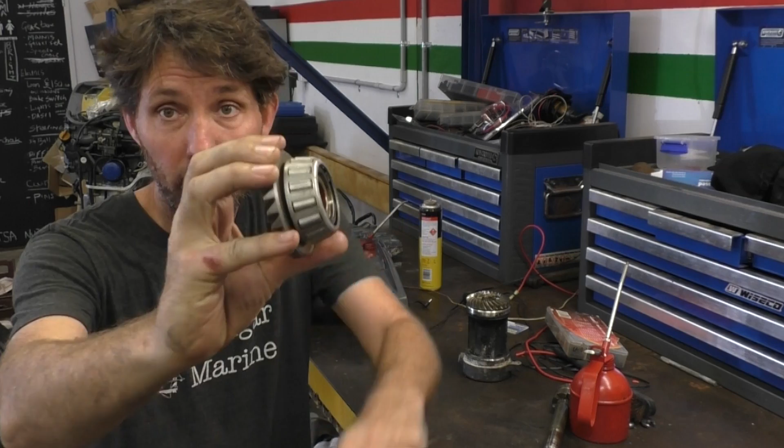Week after next. Then I thought, I know, we can go through replacing the bearings on these forward and reverse gears from when I changed the dog clutch, or some old video, I can't remember. But then I realised the spigot bearing puller I have doesn't open far enough to get the bearing race for the forward gear out, so that would have been a bit of a lame half video too.

Then I thought, I've got a kit for a sender and a fuel gauge, so I could put a fuel gauge on the green machine, but the sender unit's actually taller than my fuel tank is deep, so I can't do that either. But I will - I'll make a fuel tank, put the fuel gauge in it, but not today.

Another photo I posted on Instagram was of this water pump impeller. As you can see, it's very chewed and wasn't pumping any water at all. This outboard came in essentially just for a service to be swapped from one hull to another, so I don't really know the history of it, but when it started up it was running quite badly. I cleaned the carburetor and put some new plugs in, but it still runs poorly and backfires a bit. I'm starting to wonder whether maybe it's overheated badly at some stage and there's some damage, maybe a head gasket problem.

So I thought we could just do a bit of diagnosis on that one in lieu of every other idea not panning out today. What I'll do is start by putting the new impeller kit into this. It's not a video about doing a water pump, but I'll go through it quickly, noting some points about it being quite damaged. We'll see what came in this kit too, because obviously there's a lot of molten rubber inside the cup and inside the housing. So we'll fix that up, and then I'll fire this up and show you what it's running like.

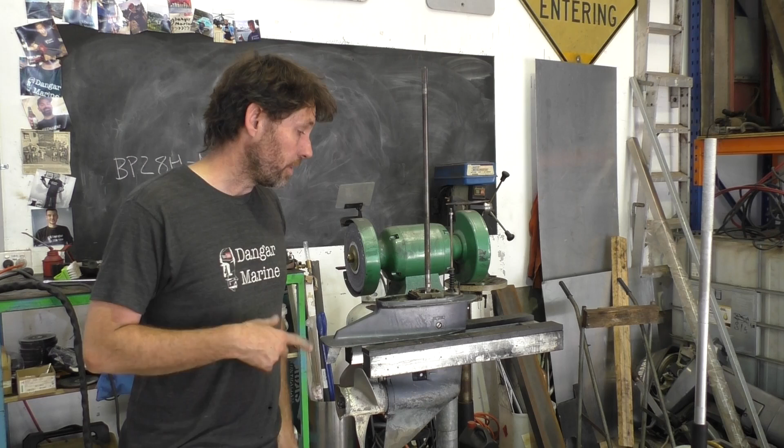Before I do this water pump kit, I'm just going to drain the oil in this, because now I'm down to having the pump plate off. I can maybe see if I need to do the drive shaft seal before putting the pump in. So we'll just see what condition that oil's in. This oil doesn't look too bad - this is the oil from this Yamaha. The yellow oil is the emulsified oil from the Evinrude 150 that I drained just before.

So we'll push on with this pump. Under here is just little fragments of rubber from the impeller. I'll clean all this out and then we'll start putting the new pump back together.

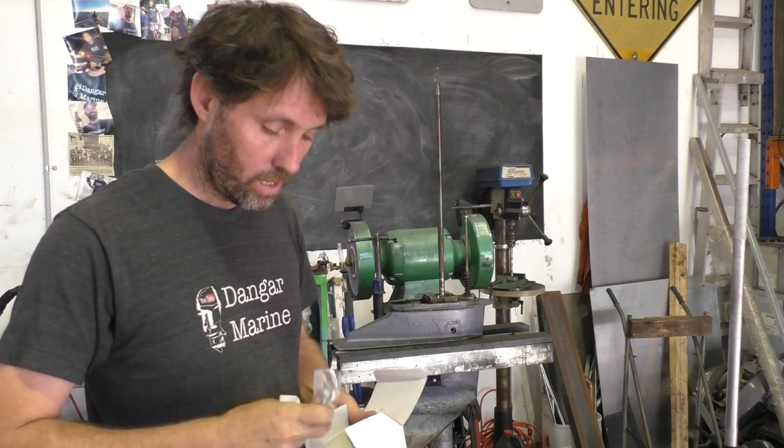So this is the kit I'm going to be using, and this is the part number for it. It's got a new pump housing, which is good - saves me cleaning up the old one. The impeller, of course, some new bolts for the housing, a new woodruff key, a new O-ring, and a new base plate.

The base plate has got a lot of rubber melted to it, and the internals of the pump housing has a lot of rubber too, so I'm glad we're just going to be replacing both of those.

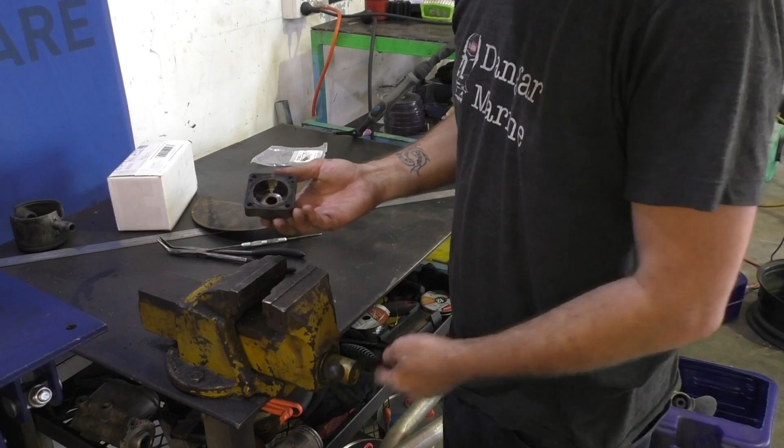To get this housing out, I'm just going to rest the edges here on a vise, and then tap it from the top to punch it out. With this vise, I'm just going to open it far enough that the pump casing rests on the edge, but the internal pump housing can drop down. Then I'll just get a little punch and a hammer.

Before I start, I'll just use this pick to pull the old O-ring out. So we'll get rid of that. I'm going to use my hand to try and hold this to stop it bouncing while I tap it.

Starting to come out easily enough. All right, so old housing out, old O-ring out. So down in here, what I thought was a bit of impeller blade I could pull out is actually this pump housing having melted.

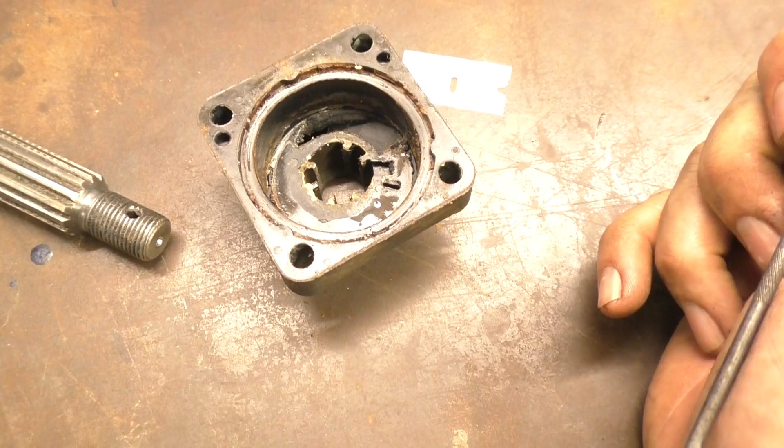So it looks like the curse is continuing. I've just figured out why everything's going wrong today - it's because I don't have any beer left. I've always said it, don't try and fix an outboard without a beer.

This is what happens. Given everything else has gone a bit pear-shaped, one thing I did want to talk about was making a little remote engine starter. They're great for checking things like spark, where you need to be at the back of the boat. We touched on that in the 'what to do when your boat breaks down on the water' video a couple of weeks ago, but I don't think I explained it very well. So what I'll do is jump up to the chalkboard, draw the circuit for the starter solenoid, and talk a bit about this switch. It's pretty simple, but I probably should explain it properly.

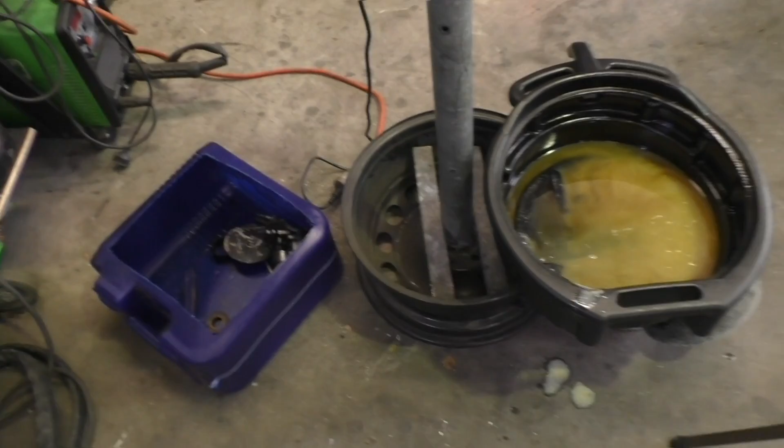Oh, you may have also noticed that I went and got a steel rim from a scrapyard. They also had these sash weights, just lead weights, at the scrapyard. A bit of gal pipe, so I just welded that in the bottom, and then a little bit of plate on top, so I can have my outboard leg holder here and a little platform for the grinder.

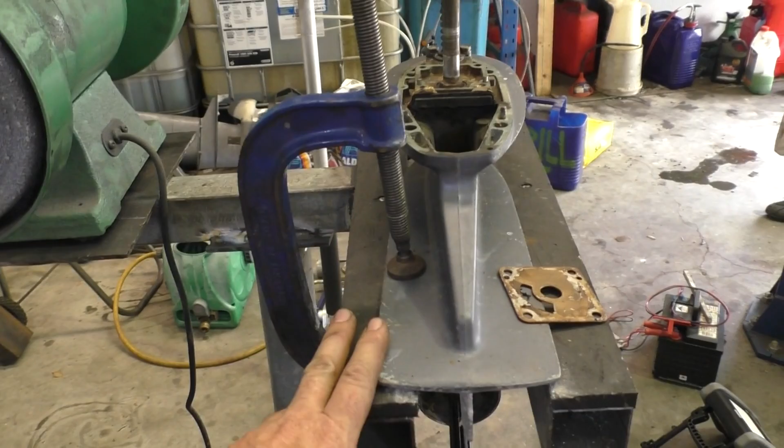It's not ideal in that you don't want to be grinding onto outboard legs, but quite often I'm doing either one or the other, and it means I can put this wherever I want, which is great. It's no longer in the vise because that was a bit of a hassle. The other good thing is if I'm doing a lot of grinding, I can move this pedestal near the door and let all the grinding dust end up there, where I can sweep it up more easily instead of it ending up all over the workbench.

So far I'm pretty happy, and surprisingly, even with that really heavy Evinrude gearbox in it, it's quite stable - more than I thought it was going to be. So that worked out all right.

All the starter solenoids have 4 connections on them. This is an aftermarket Sierra one - you'll see it replaces a Mercury and Yamaha unit. This is what they look like generally, very similar to this, where there's 2 large terminals and 2 smaller ones. So I'll draw that on the board and show what it does. If you imagine a unit here, it's got 2 small connectors and then we'll call it 2 large ones on this side.

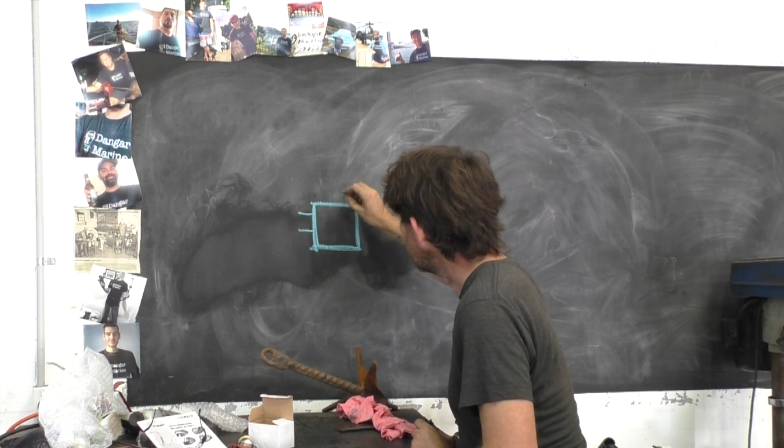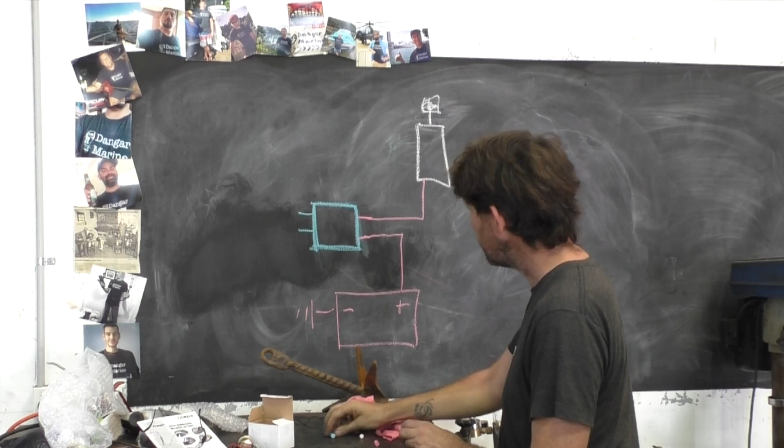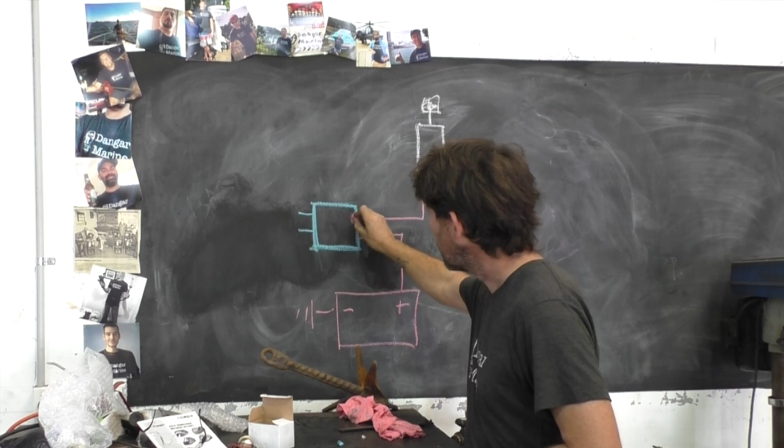The way it works is your battery has a positive and negative. Negative goes to some earth. Your positive comes up to one side of the solenoid. Up here you'll have your starter motor, and the positive comes up to one side of the starter motor, then the other side comes down and goes to ground. So these 2 connectors are the 2 large terminals that carry quite a high current.

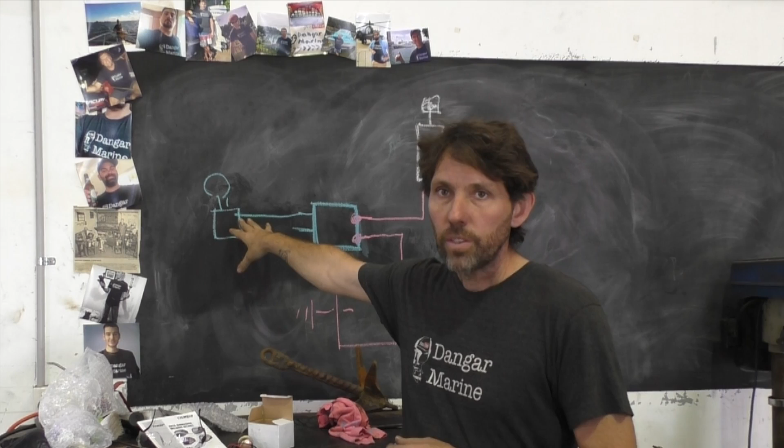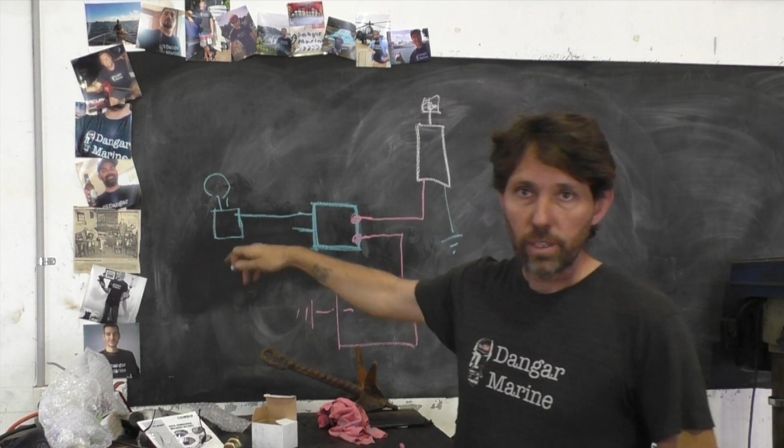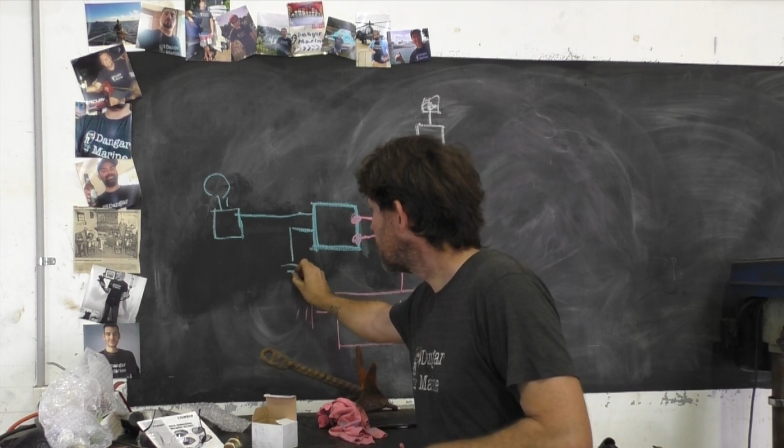So the current it needs to crank the motor over - hundreds of amps essentially. Up here you'll have your key switch, either your forward controls or it could just be a push button start. One of these wires, this red one in particular, has got just a loop for the black and a bullet connector for the red. Your red attaches to your loom if it's forward controls, or up to the starter push button on the cowling if it's a tiller steer. And then the other one here just comes to ground as well. So that's what the ring connector is.

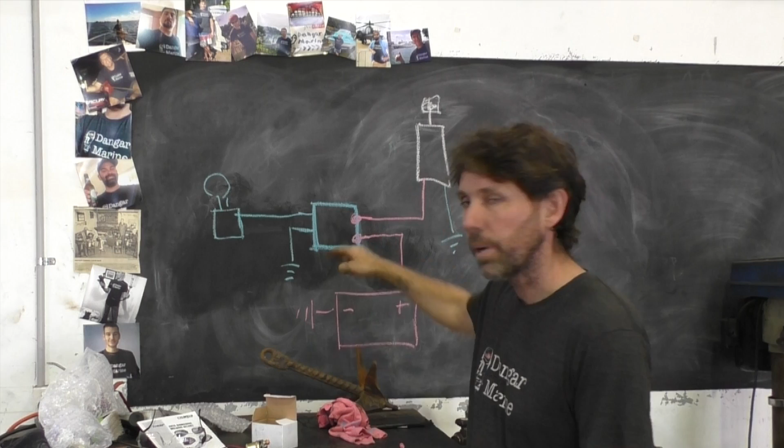Your forward controls also pick up a positive power. Often it does come from the positive terminal on the solenoid - that's a very common place for outboards to pick up power from, because it's basically a direct connection from the battery. So your forward control picks up power from there and sends it to here.

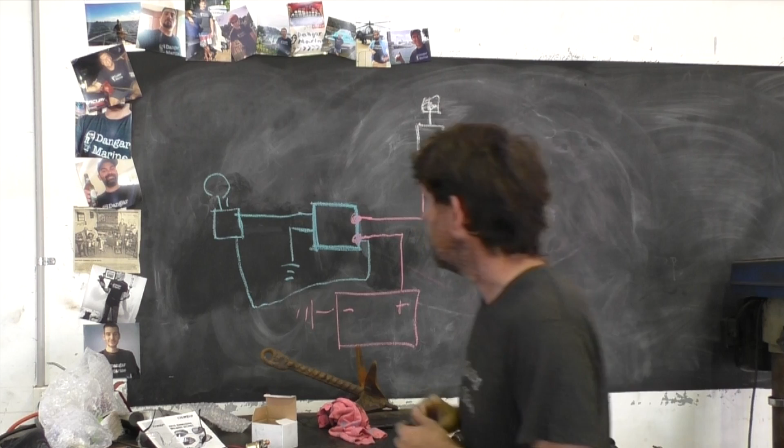Now, when you turn the key, all this is a switch. When that switch closes, positive power can run up to your switch, come to your solenoid. It then activates a coil, goes to ground. When it activates the coil, it closes this switch, and that allows power to run through your starter motor.

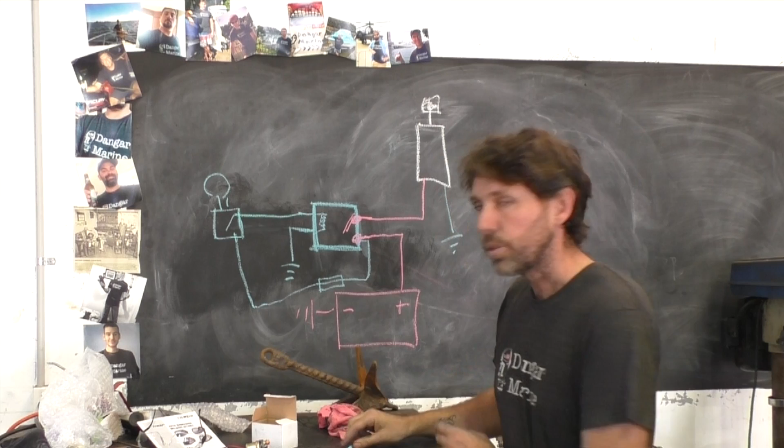Now this circuit here is often fused, so if this fuse blows, when you turn the key, no current flows through this coil, which means this solenoid won't click, you won't hear it activate, and no power is allowed to run to your starter motor.

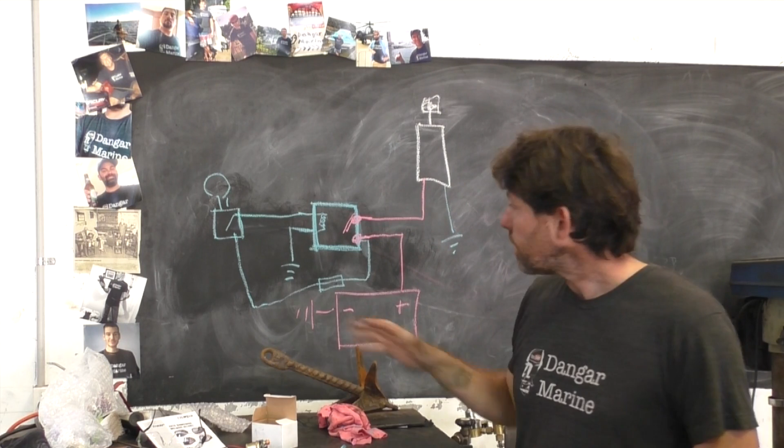So in that video, when I was bypassing this whole circuit, all I was doing was using that remote starter to take some power from here and apply it to here. Then a small amount of current flows through the wires of that starter switch to ground. It activates the circuit and then allows the high current to run to the starter motor.

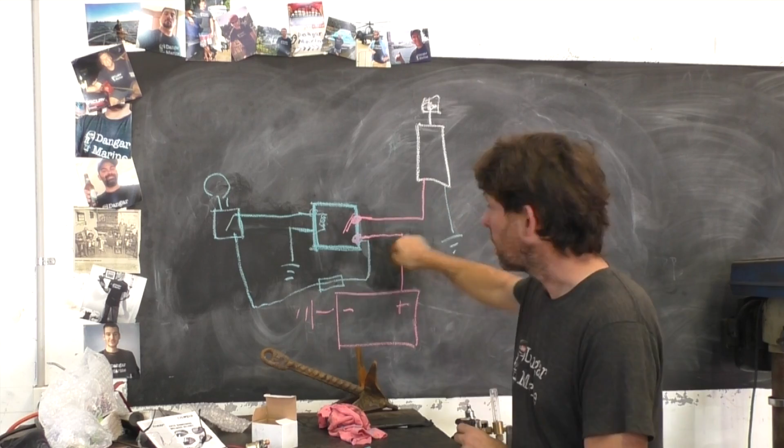So this switch is one I had lying around. It sort of suited me because it's actually got a bit of a handle to it, large enough. It was actually a limit switch for a cart. As the cart went by, there was a roller on the end here, and it would come over the roller and cut the power to an inclinator.

All I did then was go and get a little radio knob style thing from Jaycar, took the roller off, put that on the shaft, then had 2 wires that don't have to carry a lot of current, so they don't have to be huge, and put on a couple of alligator clips. And that's really all it is - 2 alligator clips and a momentary switch.

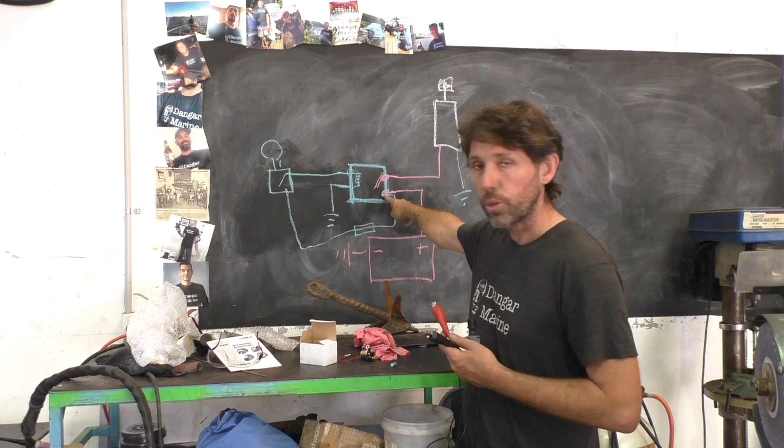So really straightforward. Then what I do is I hook the red side to a source of power. That could be straight to the battery positive, could be the terminal on the solenoid where the battery positive comes to. I just need 12 volts.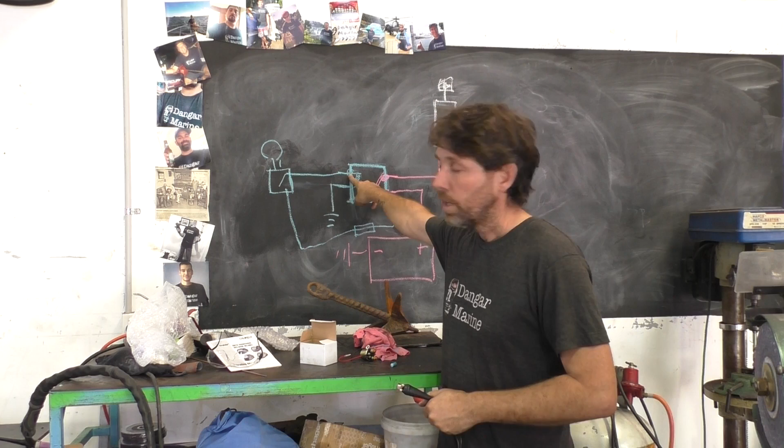Then all I need to do is connect the other side, the black side, to the positive on this solenoid. So there's 2 small wires. One has to go to a ground, then the other is where I hook the black one.

In this case, if my battery positive came straight to here, the other one went off to the starter motor, I would hook my red to the one where the battery came into, like that. I would hook my black to essentially the positive coming in. I could, if I had enough room, simply go on the nut here as well. And then when I hit the button, I'm just supplying 12 volts to there to activate the solenoid.

So one common mistake I see is where people connect them across the 2 large terminals like this. If you do that and you hit the button, all the current for trying to start the motor is passing through your switch, and you don't want that. This will get really hot, the wires will melt, it'll get nasty really fast.

The one advantage to that is that if the solenoid itself is dead, you can still start the motor. If the solenoid's not functioning, supplying power isn't going to make it work, but doing this will. But if you're going to do that, you need a switch that can handle hundreds of amps, alligator clips that can handle hundreds of amps, and wire as thick as your battery leads. The whole thing needs to be much, much, much chunkier than it is.

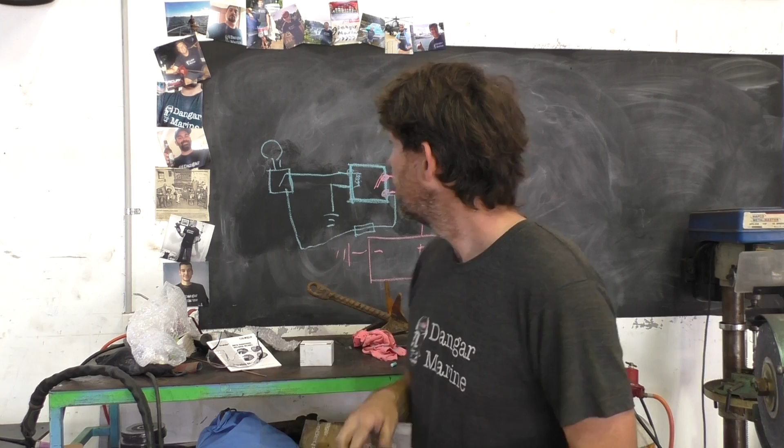So that's not the idea with this particular unit. There are 2 main benefits to this. One is that you can start the boat should your key mechanism have failed, that kind of thing. And the other is when you're trying to diagnose a problem.

To be able to stand there with the cowling off, hit the button, look at your spark tester, listen for a strange noise coming from the starter motor, all that kind of thing, means you can diagnose jobs on your own without needing someone at the front of the boat, someone at the back. So it's a really good reason to put one of these together.

To make one of these, you buy all the parts for under $20 at your average Jaycar electronics store sort of thing. Nothing special about the switch, nothing special about the clamps, just use whatever you can find lying around. If you can't find a larger switch like this, it might be good to mount the switch onto some sort of handle so you can use it. That might be a little project box or something, but just something to make it a little bit more comfortable to use so you also don't have exposed connections and wires and things like that.